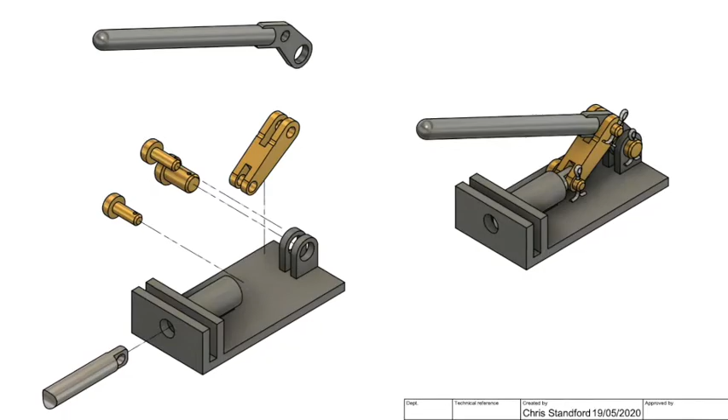Fusion 360 will also help us create some exploded drawings and animations of our product once we've modelled it, which can be really useful when communicating the assembly of our product. So once we have our fully assembled model, we're going to go to the animation window and we can start creating our exploded drawing.

It will explode your assembly automatically, but doesn't always go in the direction you want them to go. So here's how to do it one component at a time.

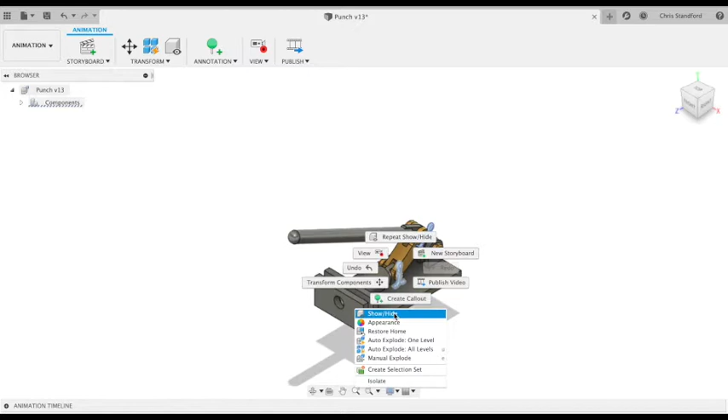We're going to start off by hiding the split pins because I don't want them on part of my exploded drawing. So we can right click and we can then hide those. And then I can start disassembling my components one at a time.

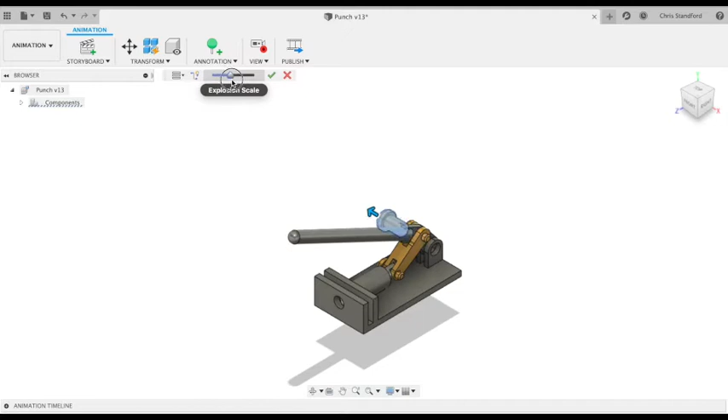So if we go to transform and then manual explode, we can choose the direction we want our component to move in, and then the extent to which you want it to explode. We're going to go all the way to the end and then click the tick to say you're happy with that. I'm adding in a line so you can see the movement of that pin.

Then I'm going to do that with the remaining two pins. The shortcut for manual explode is just pressing the E key on your keypad, which will help speed up the process.

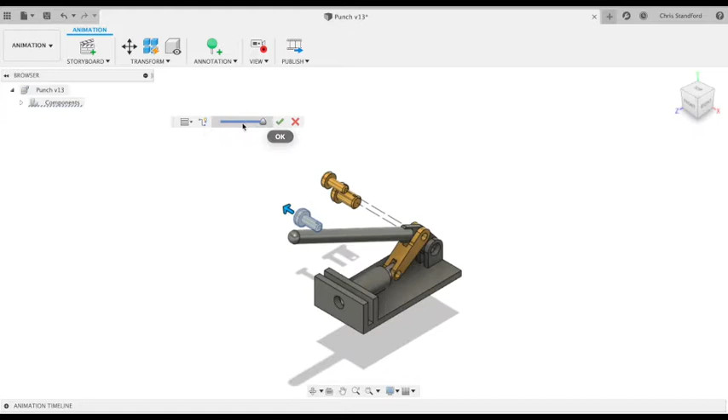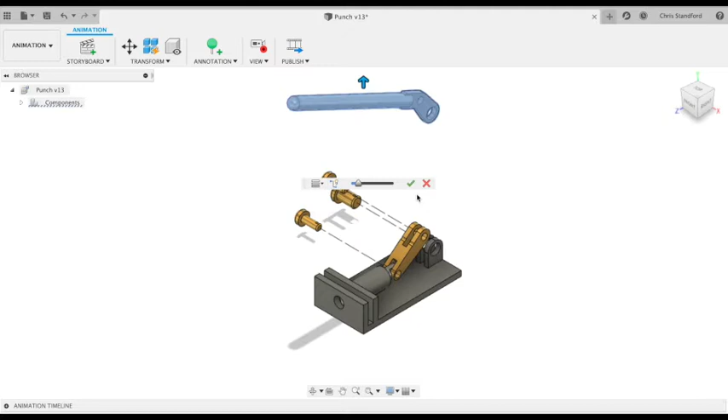So these next components I'm going to explode in an upwards motion. So about there. And then we're going to move the linkage up halfway in between those two. Upwards again.

I'm going to add the line in there. Okay, and finally the pin. That's going to move in that forwards motion. Again, adding that line in.

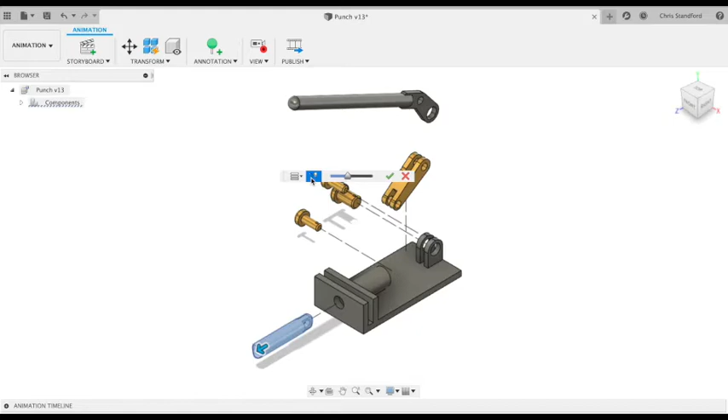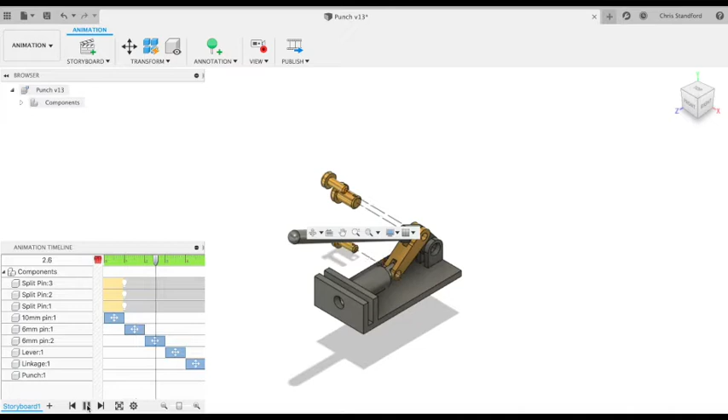If we click on the animation timeline, we can then edit. If I move this out of the way a minute so we can still see our drawing, we can edit how long each component takes to explode and the order in which you explode them.

So if we come back, I can move that along the timeline so they're not all doing one after another, they're sort of overlapping. And then I can change the duration so it takes a slightly longer amount of time. So if we go 2 seconds to create that movement.

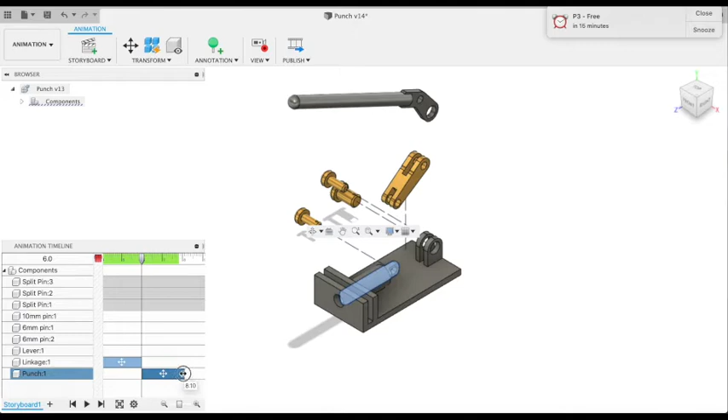I can also just highlight it and drag the end to extend the duration as well. And then we can go back to the beginning. Let's get that to 8 seconds. And then we can play that animation to see if we're happy with it. That looks good to me.

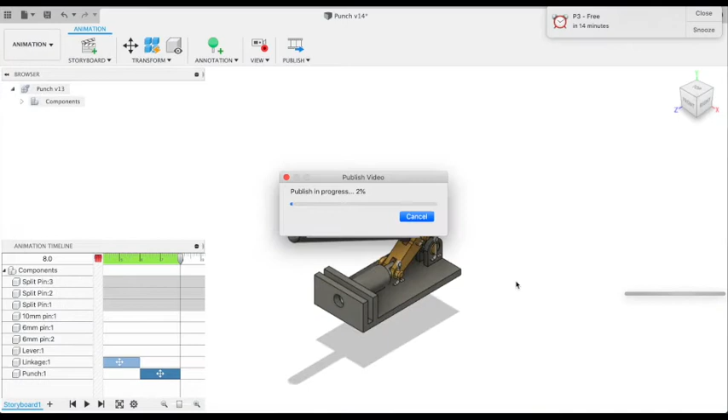Once we're happy with our animation, we can go to publish to download the video. And there we've got our video file that we can include in our digital portfolio if we wish. We can also create a drawing from that animation as well, so we've got an exploded drawing that we can include in our portfolio.

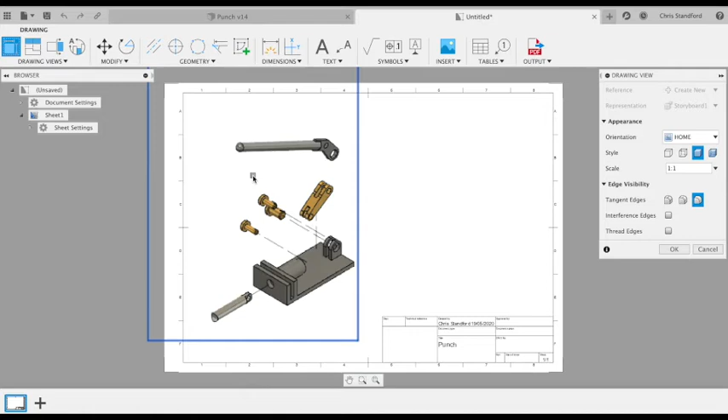If we go to the drawing window and choose from animation, and then choose the scale. This product will fit easily on an A3 paper at scale 1:1. And then you're going to position that on the page. Now I want my product to remain as a shaded object, so make sure you select that.

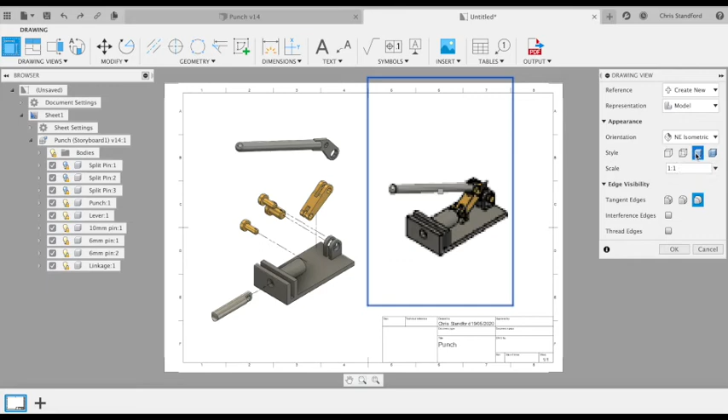And then we're going to add in another view of our finished assembly that hasn't been exploded. And again, make sure that once you've positioned it, we actually select shaded. Okay, and we've got our drawing, which we can then download as a PDF to get a slightly better quality drawing of our model.

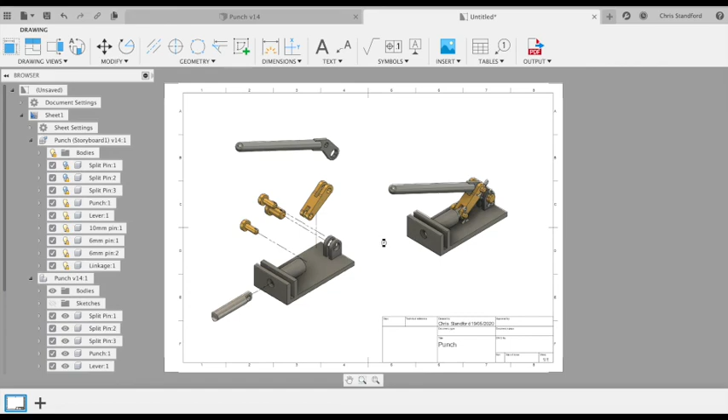Once you've named it, it'll download as a PDF, and you can see that slightly better quality drawing that you can include in your design portfolio.